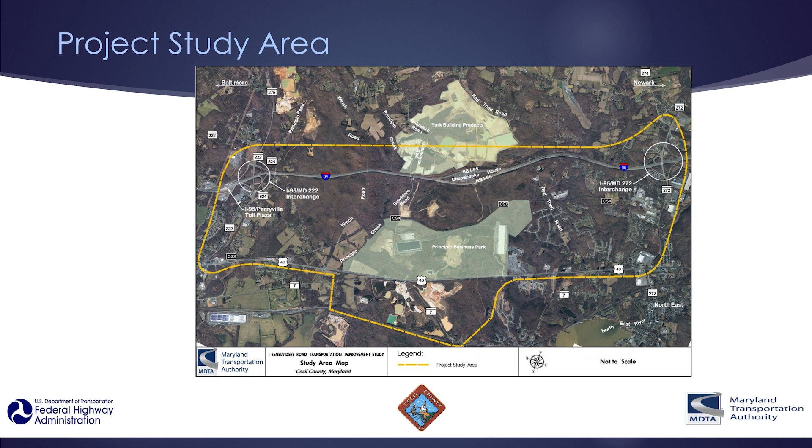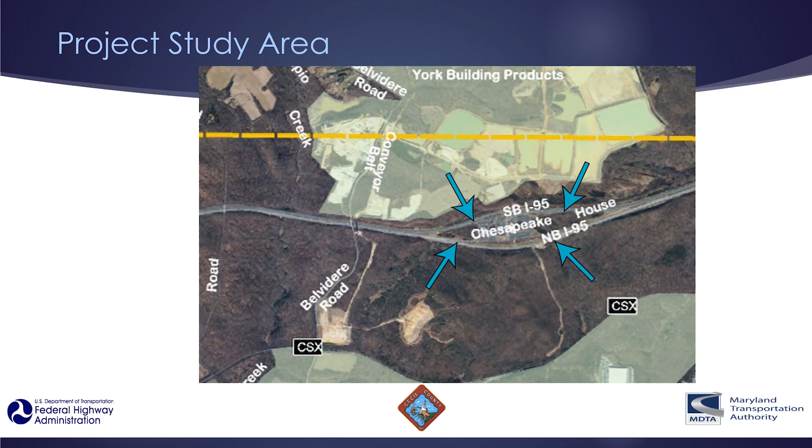Belvidere Road, Winch Road, and Red Toad Road are two-lane roads crossing I-95 that are owned and maintained by Cecil County. The Chesapeake House Travel Plaza is situated between the northbound and southbound lanes of I-95 and features left entrance and exit ramps in each direction of I-95. The Travel Plaza is located approximately 1 mile north from where Belvidere Road currently crosses over I-95.

The project study began in 2018 and has included 2 public open house events in 2018 and 2019, as well as ongoing opportunity for public information and comments. As presented in previous open houses, the purpose of this project is to facilitate the safe and efficient flow of local, commuter, and commercial vehicle traffic movements of people and goods along I-95 and the Belvidere Road area, while providing a cost-effective and environmentally sensitive multimodal transportation system that supports existing and future travel demand, land use, and development efforts that are consistent with the state and Cecil County planning policies.

The following 3 specific needs for the project have been identified: accommodating increased traffic demand and operations associated with the proposed development, addressing safety concerns related to additional traffic, including truck traffic associated with the proposed development, and ensuring the ability of the roadway network in the vicinity of Belvidere Road to support current and projected economic development and job opportunities within Cecil County's Principio Enterprise Zone.

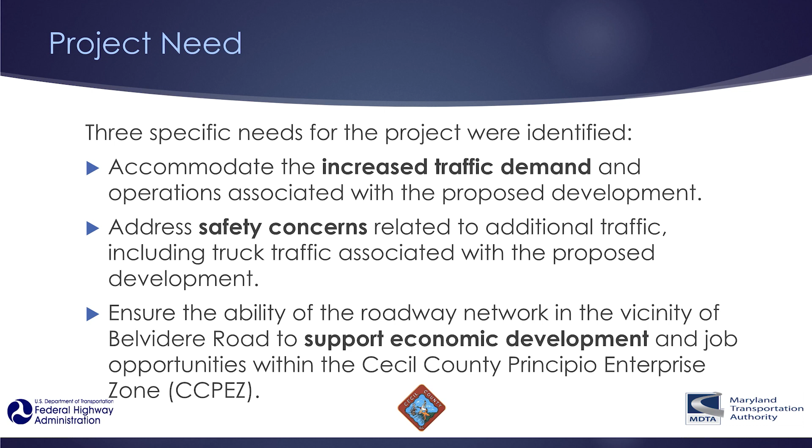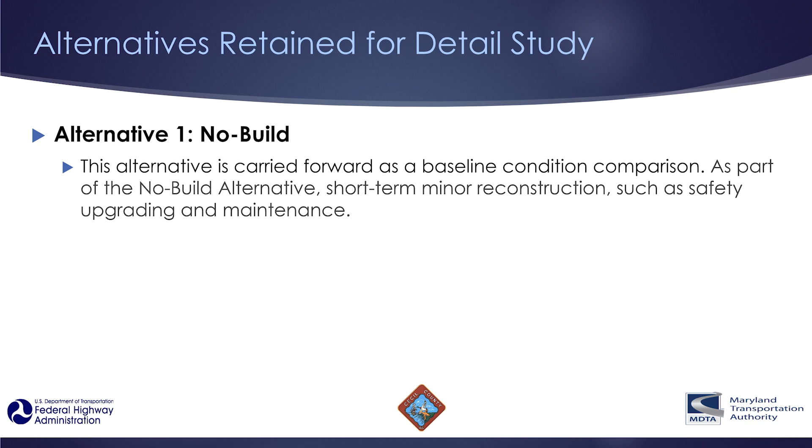Following an analysis of a range of alternatives that met the project's purpose and need while maintaining an environmentally sensitive, multimodal transportation system, 2 alternatives have been retained for detailed study. Alternative 1, the no-build alternative, will be carried forward as a baseline for comparison to conditions under Alternative 4D Option 1. Alternative 4D Option 1 would include a new interchange at I-95 at Belvidere Road. This alternative will be carried forward because it offers one of the best operational benefits compared to the full range of proposed alternatives and results in the lowest level of environmental impacts.

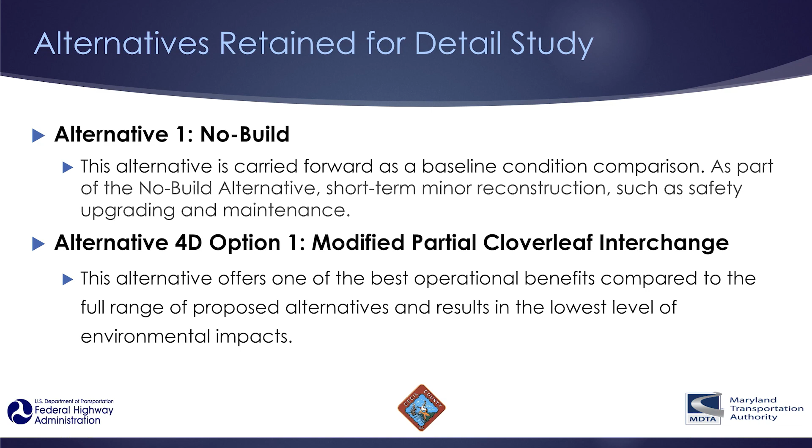This alternative includes on and off ramps in the southwest and northeast quadrants using a combination of loop and outer ramp connections. The southbound I-95 to Belvidere Road loop ramp and Belvidere Road to I-95 outer ramp are located in the southwest quadrant. The loop ramp from I-95 northbound to Belvidere Road and outer ramp from Belvidere Road to I-95 northbound are located in the northeast quadrant.

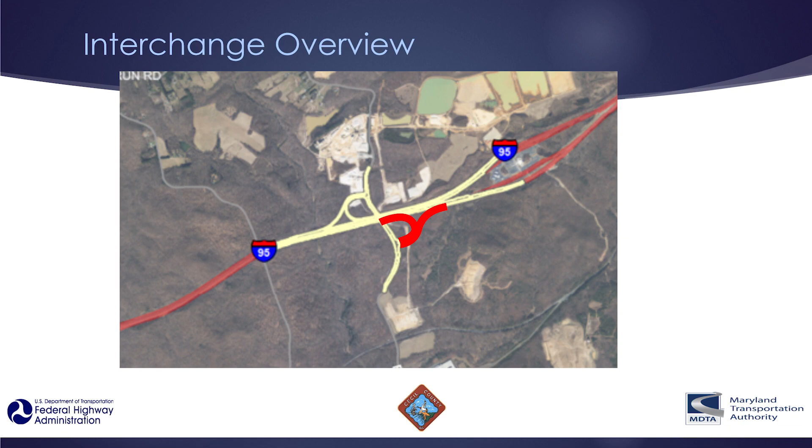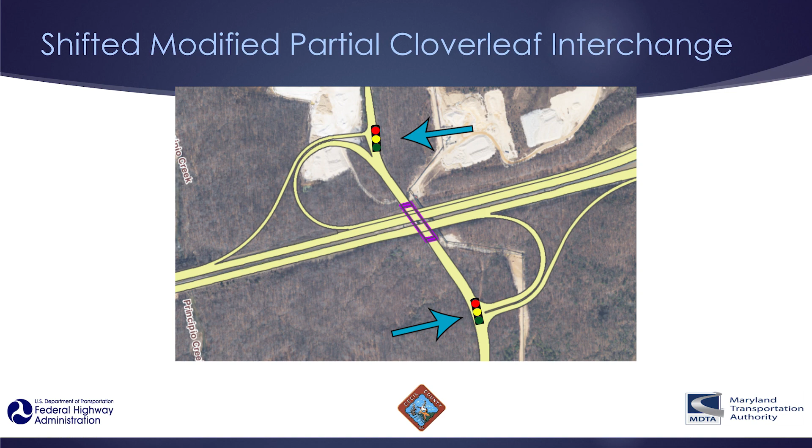The preferred alternative would include access to I-95 from Belvidere Road at 2 signalized locations. Traffic along Belvidere Road would access southbound I-95 via the outer ramp located in the southwest interchange quadrant. Traffic along Belvidere Road would access northbound I-95 via the outer ramp located in the northeast quadrant. Traffic would access Belvidere Road from northbound and southbound I-95 via the loop ramps.

With current construction and future planned development, traffic demand will increase within and around the study area. The interchange provides a number of benefits that will be identified in the following slides. These benefits include improved access to the development, improved traffic operations, and increased safety throughout the study area.

In addition to the existing businesses at the Principio Business Park, there is additional short and long-term development that is anticipated in the Principio Enterprise Zone. This development surrounds the Principio Business Park to the north and south and lies between I-95 and the CSX rail line. Future development is scheduled to be implemented in phases beginning within 2 years, reaching completion within 20 years.

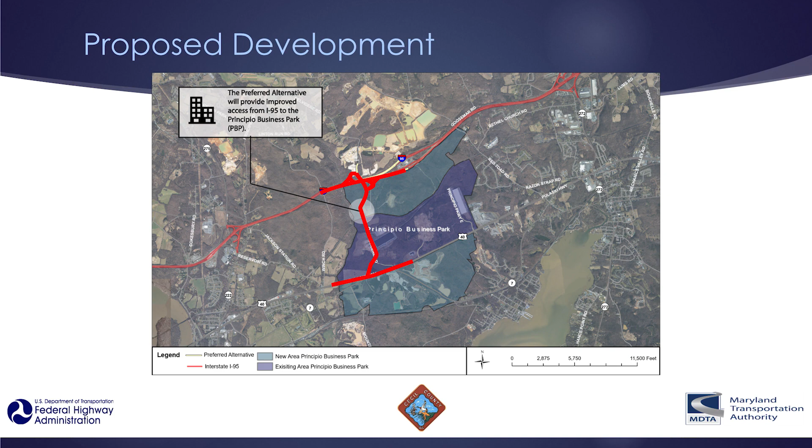Anticipated future development includes manufacturing, warehouses, and retail facilities. The preferred alternative will provide improved access from a new interchange with I-95 to the Principio Business Park. With the existing roadway alignment, truck traffic uses several local roadways to reach the Principio Business Park.

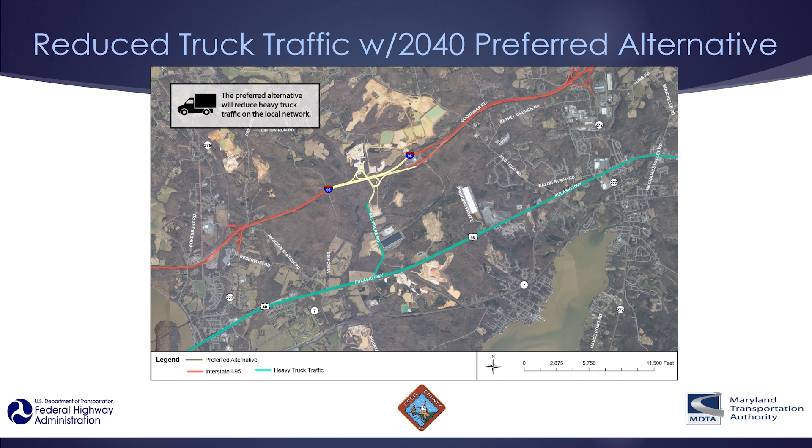Level of service is a method of measuring delays at intersections. Level of service is used to categorize traffic flow and assign quality levels of traffic based on performance measures. Level of service is typically measured on a scale from A to F, with A being free flow and F for high congestion stop-and-go roadway segments.

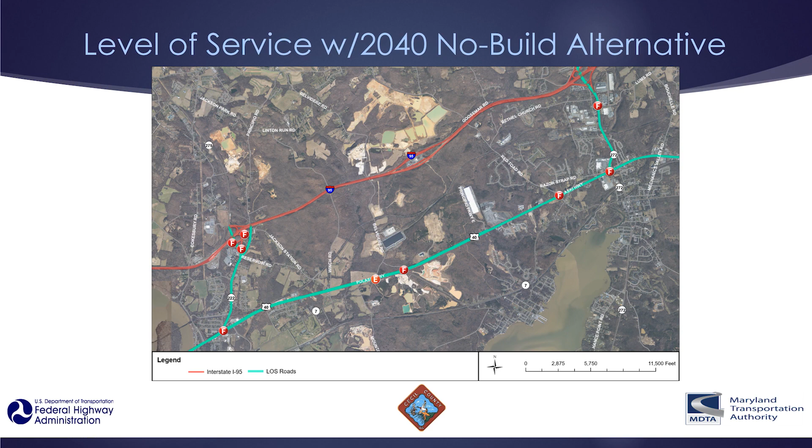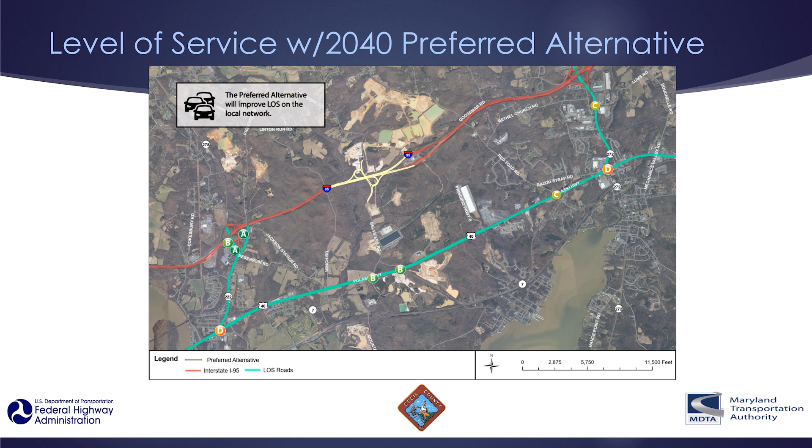With projected growth within the study area, several intersections are anticipated to be failing in the 2040 design year under Alternative 1, meaning that they will be below a level of service D. In the 2040 design year, the preferred alternative will improve the flow of traffic on the local network and enhance traffic operations at several intersections throughout the study area.

Maryland Department of Transportation State Highway Administration crash data was analyzed for the years 2015 through 2017 for all study area intersections. Intersections exceeding a 1.0 crash rating are considered to be high crash locations and are highlighted on the map. The data reveals that 6 intersections have crash rates higher than 1.0, and of those 6, 4 intersections appear in multiple years, with the intersection of US 40 and Maryland 272 having a crash rate higher than 1.0 for all 3 years.

The preferred alternative will reduce the number of vehicles passing through these high crash rate intersections by providing improved access to the Cecil County Principio Enterprise Zone via a new interchange at I-95. The preferred alternative will mainly involve impacts associated with traffic and transportation, natural and environmental resources, and construction.

As the project progresses, we will continue to evaluate opportunities to avoid, minimize, and mitigate impacts to these important resources, and the cumulative results of these investigations will help us, in coordination with the Federal Highway Administration, complete the environmental documentation for the project. The following slides highlight the environmental resources we have considered during the project.

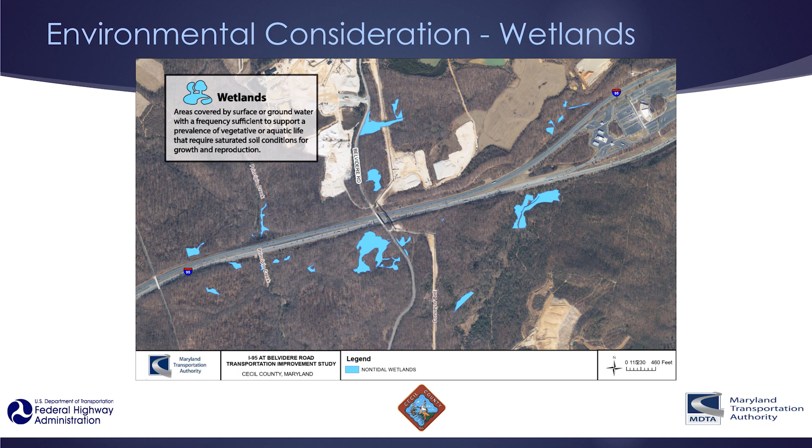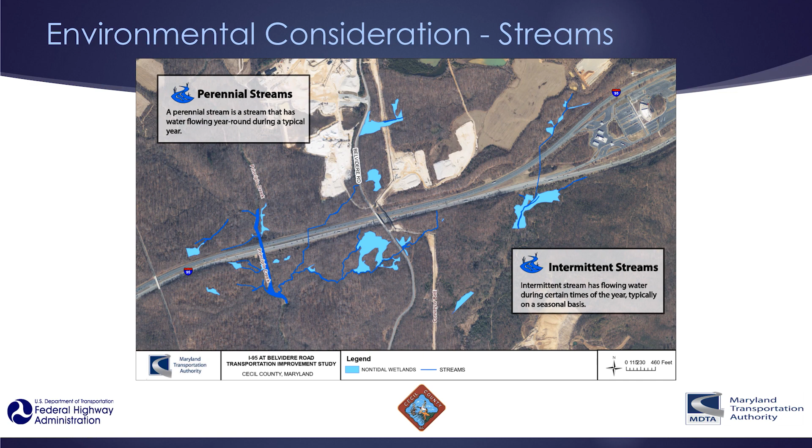Wetlands are areas covered by surface or groundwater with a frequency sufficient to support a prevalence of vegetative or aquatic life that requires saturated soil conditions for growth and reproduction. A perennial stream is a stream that has water flowing year-round during a typical year. An intermittent stream has flowing water during certain times of the year, typically on a seasonal basis.

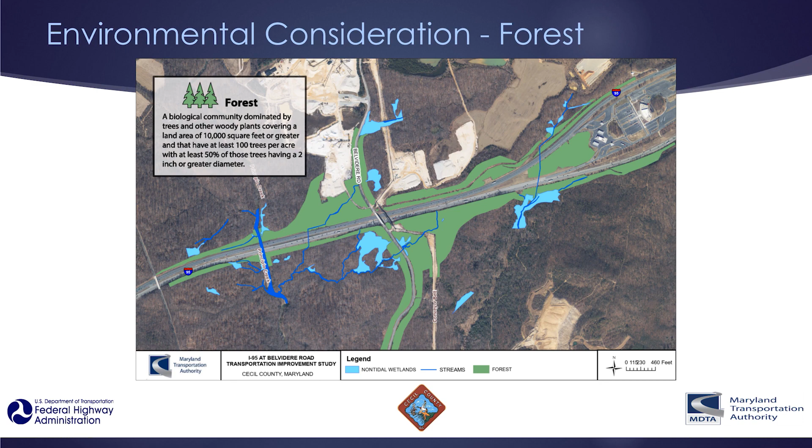Forests are defined as biological communities dominated by trees and other woody plants covering a land area of 10,000 square feet or greater, and that have at least 100 trees per acre, with at least 50% of those trees having a 2-inch or greater diameter. Specimen trees have a diameter, measured at 4.5 feet above the ground, of 30 inches or more, or are trees having 75% or more of the diameter of the current state champion tree.

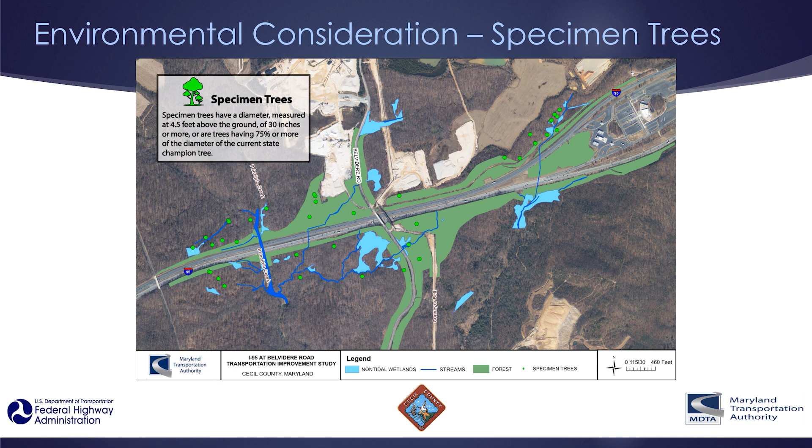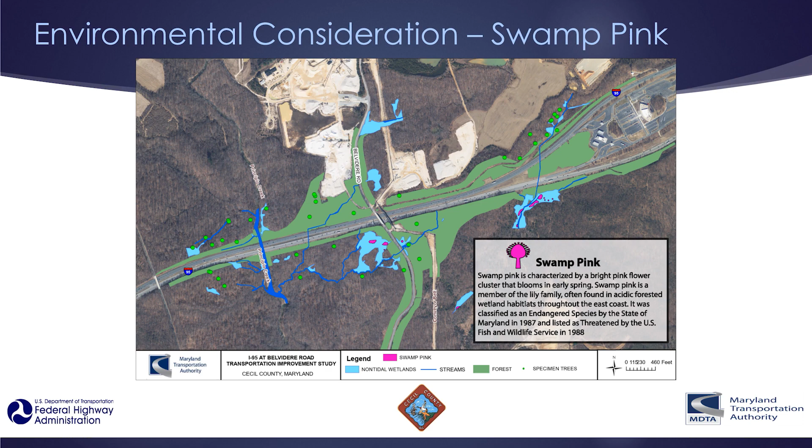Swamp pink is characterized by a bright pink flower cluster that blooms in early spring. Swamp pink is a member of the lily family, often found in acidic forested wetland habitats throughout the East Coast. It was classified as an endangered species by the state of Maryland in 1987 and listed as threatened by the U.S. Fish and Wildlife Service in 1988.

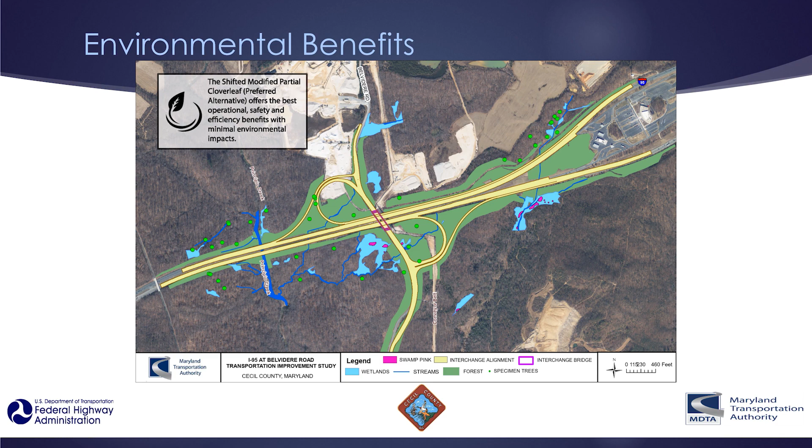The shifted modified partial cloverleaf, or the preferred alternative, offers the best operational, safety, and efficiency benefits while also maintaining minimal environmental impacts. As shown, this alternative was designed in order to minimize impacts to environmental resources within the study area, including wetlands, streams, forest areas, and highly sensitive, federally threatened plant species like swamp pink.

NEPA documentation and advertisement of the project's request for qualifications are scheduled for the spring-summer of 2020. Requests for proposal are scheduled for fall of 2020. It's anticipated that the project will start construction in spring of 2022 and reach completion in summer of 2025. Please note that this schedule is tentative and is subject to change pending the completion of the NEPA process and the final request for qualifications and request for proposal advertisement dates. Interested design builders should follow the project on eMaryland Marketplace Advantage and contact the procurement officer as needed.